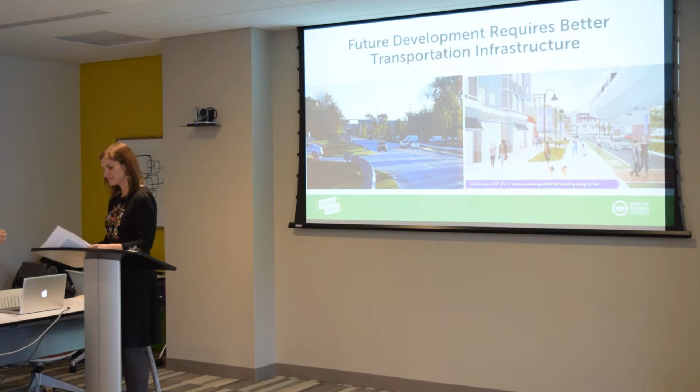As Rachel was mentioning, there's going to be a variety of new developments taking place in Moore Park KOP. We have the residential projects taking place on 750 Moore Road, with 248 units under construction right now. And then on Vandenberg Boulevard, you have 320 residential units opening up, we believe, this April. So there is a variety of new developments taking place.

King of Prussia Industrial Park is no longer strictly industrial. It's no longer strictly office. It's an actual mixed-use area. And then also, it's going to be inviting more entertainment venues, such as Bury the Hatchet, which has already opened up on 8th Street, I believe.

And we encourage people to come out and play at that location. And then also you have service and retail that will be opening up within the business buildings themselves for that mixed-use quality.

So with that new development, we needed to adjust the transportation infrastructure. The road diet itself has been something that's been getting studied for a few years now. The project team involves the King of Prussia District and Upper Merion Township.

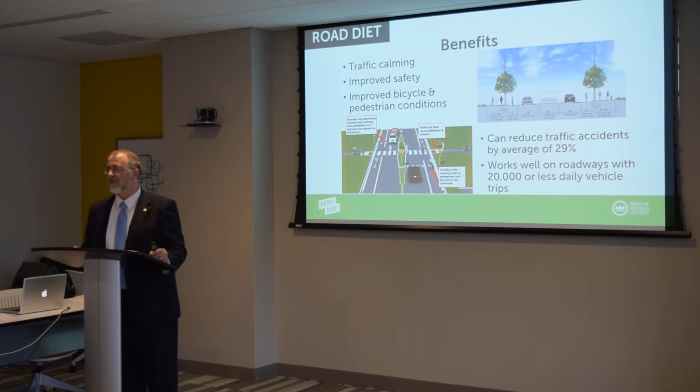The U.S. Department of Transportation has found that road diets can reduce traffic accidents by an average of 29%, and it works well with roadways that have 20,000 daily vehicle trips or less. Currently, when we did the study, the vehicle trips were around 12,000 per day. We projected out to 2025, and that's projected to be 15,000, so we're still well underneath the 20,000 vehicle daily trips.

So just as a brief recap of the history: in 2011 the King of Prussia District applied for the Delaware Valley Regional Planning Commission Transportation and Community Development Initiative Grant to study the road diet. In 2013 the road diet study was concluded, including Moore Road at the time. In 2014 Upper Merion Township and the King of Prussia District worked together to pass the mixed-use rezoning for the business park. In 2015 they were awarded a Transportation Alternatives Program grant from the Highway Administration for $432,000 to implement this program.

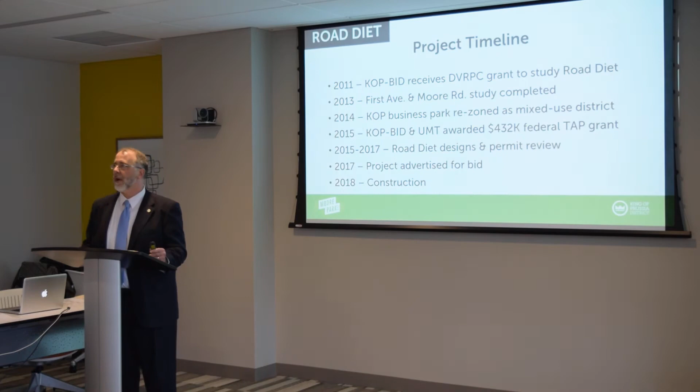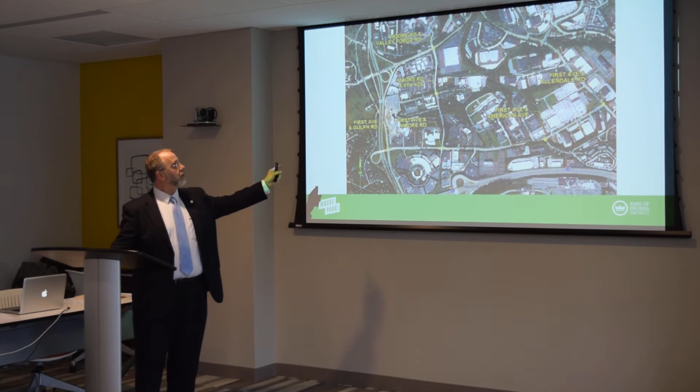2015 through 2017 went through the design and permitting review process, and at the end of 2017 the project was put out to bid. In 2018 the competitive bid was chosen, Highway Materials Inc. As I was saying, the project study originally looked at First Avenue and Moore Road, but this project is only taking place on First Avenue.

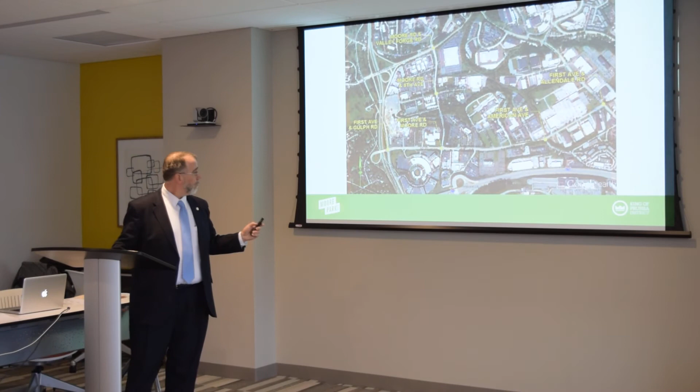As for existing conditions, there's a variety of conditions along First Avenue. You have not only the 4-lane road, but also varying degrees of right-of-way, so sometimes there's a shoulder, sometimes there isn't. You also have long sections along First Avenue without sidewalks, and those sections that do have sidewalks are not ADA compliant. You also have limited pedestrian crossings, strictly limited to parts of the intersection, not all four corners of each intersection.

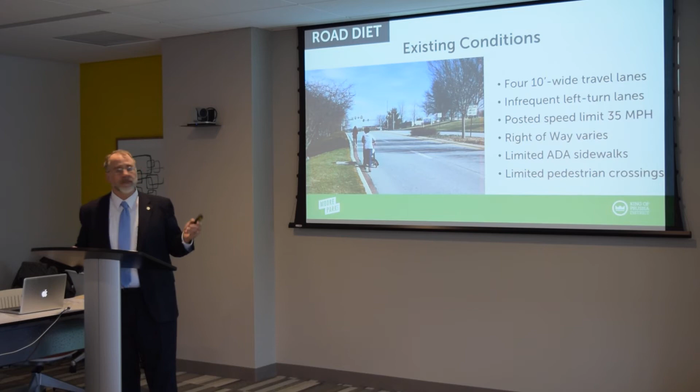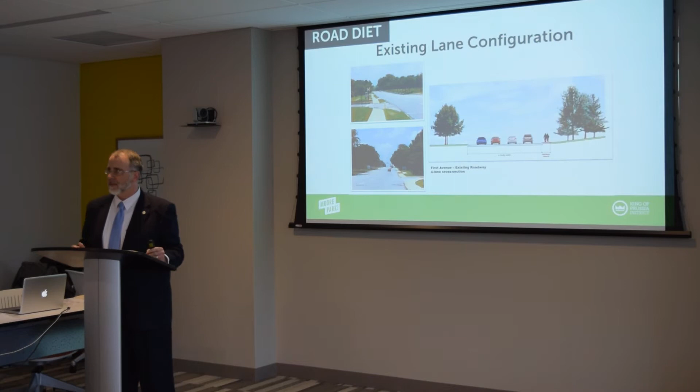The road diet is hoping to change that. Currently, with the 4-lane configuration shown in the illustration, it allows for greater speeds or encourages people to drive faster than the posted 35-mile-an-hour speed limit. Also, you have people turning left from the left lane, which some people perceive as the passing lane whenever you have multiple travel lanes.

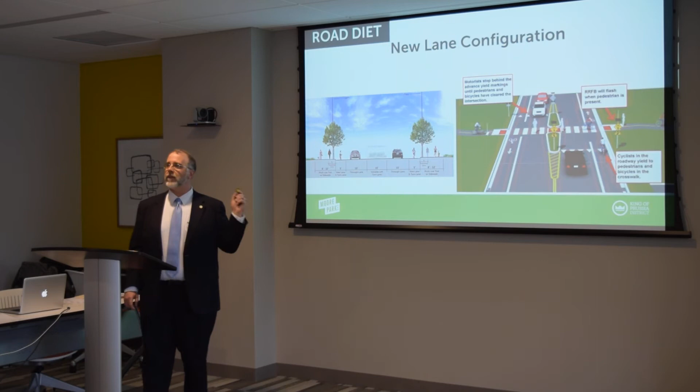With the new lane configuration, you will have one travel lane in either direction, plus a dedicated center left turn lane. That's where, particularly in the morning, you'll find most of the traffic backup, based on people turning left out of the inside lane. This will allow folks to pull into the dedicated turn lane to make that left turn into each of the individual parcels. There's also going to be a 5-foot bike lane on either side, and the median or shoulder will increase or decrease depending on the location.

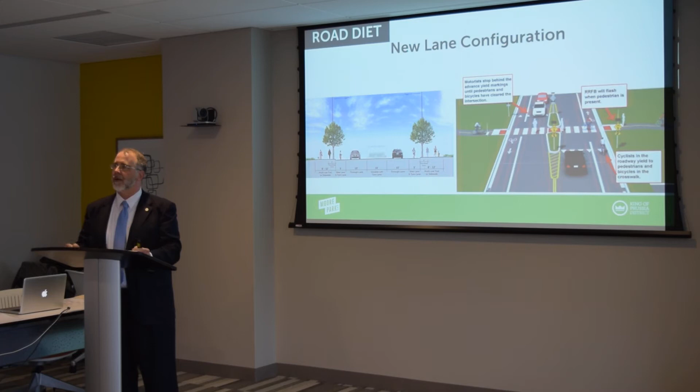The actual design does not change the distance between the current set of curbs - the current curbs will remain the same, it's just that the pavement markings will change. Also, we'll be having a mid-block crossing. This signalized crossing will be down between Radial and Trillion, crossing the road between Michelmack and Arkema. So that's where the mid-block crossing will take place.

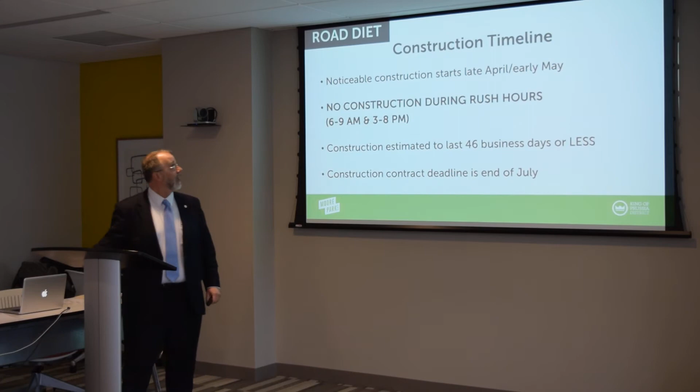For a construction timeline, noticeable construction won't start until late April, early May. There's still some PennDOT reviews that need to take place. The construction hours will not be taking place during rush hour traffic.

So between 6 to 9 a.m. and 3 to 8 p.m., there will not be any construction activity taking place during the weekday. Construction is estimated to last 46 business days. That could be less, depending on the actual time and also the weather conditions.

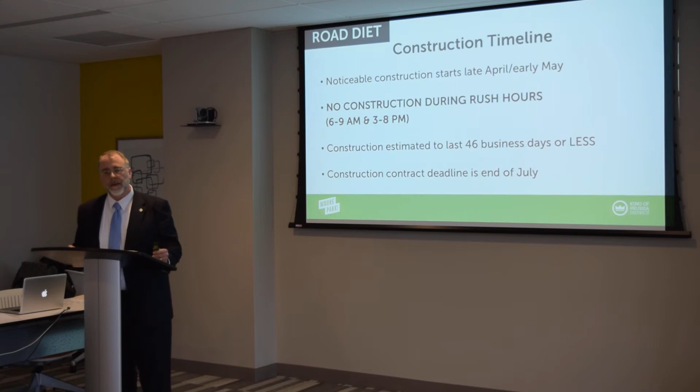And then everything is going to be wrapped up by the end of July. Tim will be the person right here sitting up front.

Tim, raise your hand if you could, please. He's going to be the primary full-time construction inspector on site whenever construction activities are taking place. So if you have an immediate question or concern on site, talk to Tim. He will be able to help figure out what's taking place and address the situation. Ray, we will be in contact with Ray, the construction inspection manager.

Milling and paving the roadway will not take place during the business workday. It will be at 8 p.m. to 5 a.m., and it's approximately going to be 6 days total. So milling and paving will approximately take 6 days, and that's only going to be taking place at night, so you won't have to deal with the noise and dust created by that activity.

The contractor and construction inspector will keep traffic flowing safely. If you've signed up with Julie in the back, we will continue to send out regular updates on the progress of the project, and provide any additional information if there's anything that takes place that you need to be aware of.

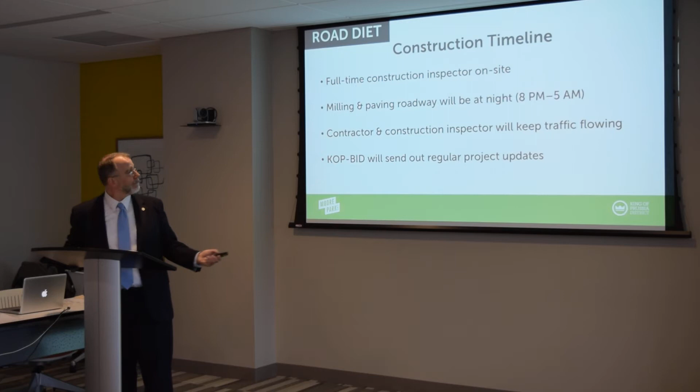So with that, you will have this sheet that's already been handed out to you, which has our contact information. This is just a brief one-sheeter. You can certainly contact me. That's my email address and phone number. If you have any questions or concerns, please feel free to get in touch with me.

We'll also be having all the information and updates placed on mooreparkkop.com. So I encourage you to visit the website. And with that, we'll open it up for questions. Anybody have any questions?

Back there in the back row. Are you planning on putting traffic lights up at businesses to alleviate what's sure to be significant congestion from workers trying to turn left onto First Avenue? No, there's not going to be any traffic lights.

Well, let me repeat the question. He was mentioning that people exiting the parking areas, asking if there's going to be traffic lights at those parking areas. There will not, but we anticipate that the traffic will not be impacted any more than it already is. You're going to be crossing fewer lanes in order to get into the travel lane. That'll be primarily between Moore Road and American Ave. And you will also be able to pull into the turn lane in order to merge into the travel lane if necessary.

Do you have anything to add? Well, Chris, you addressed it, but back when the study was evaluated, we did look at driveways up and down First Avenue, what those volumes were, and could they still be accommodated with the one lane. Obviously, it was a big concern at the study stage, and we're showing that traffic should still be able to access. There's still going to be gaps created by the signals at Moore Road and First and American Avenue, so that amount of volume should still be able to be handled in that one lane section.

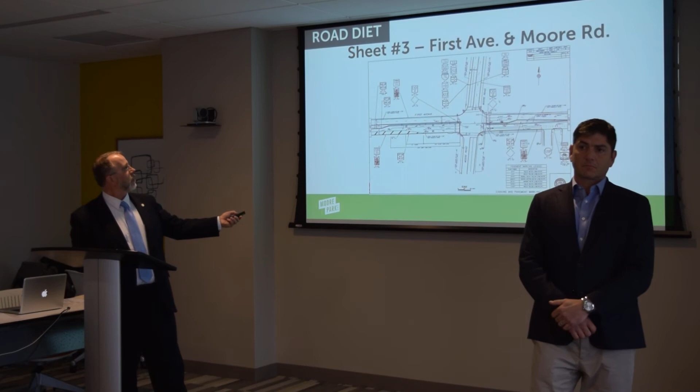So when you do get to the light, is it going to still be 2 lanes or 4 lanes? Beyond the light, it will be 4 lanes. Just before the light, it will also be 4 lanes. So like for 100 yards? The actual location is just past the top parking lot area, where the roadway opens back up to 4 lanes.

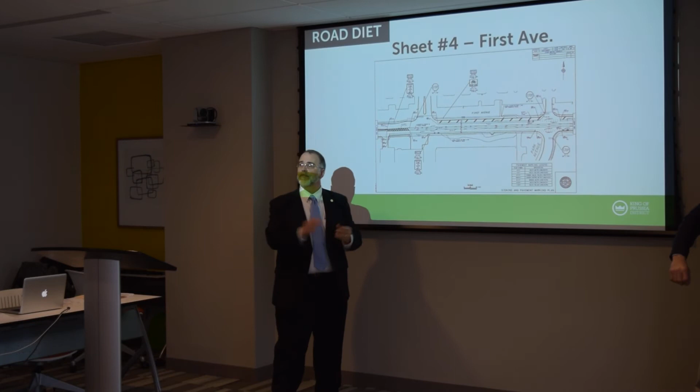So at the signal itself, you're going to have the same lane configuration you have today. The impact is that since we don't have 2 lanes the entire stretch, there'll be only 1 lane. You will have a little bit of a longer queue approaching that intersection, but we should still be able to process the same number of cars as we do today.

Towards Gulph Road, it'll be the same configuration as today, 4 lanes right now. So the only road diet section we're talking about is just east of Moore Road, or north of Moore Road if you want to call it First Avenue, north-south, to just south of Allendale. We'll go through the American intersection, but at either end, the lane configurations are still going to be as they are today.

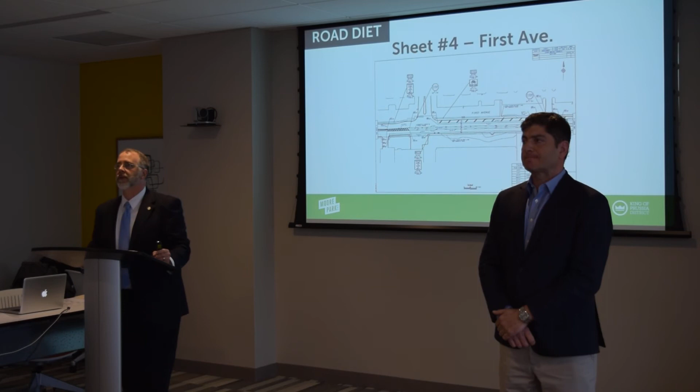Will truck traffic be affected in any way, and access for trucks to the industrial buildings? No, and thanks for pointing that out. One of the things I didn't mention was that with the road diet, most of it is pavement markings. There won't be physical barriers.

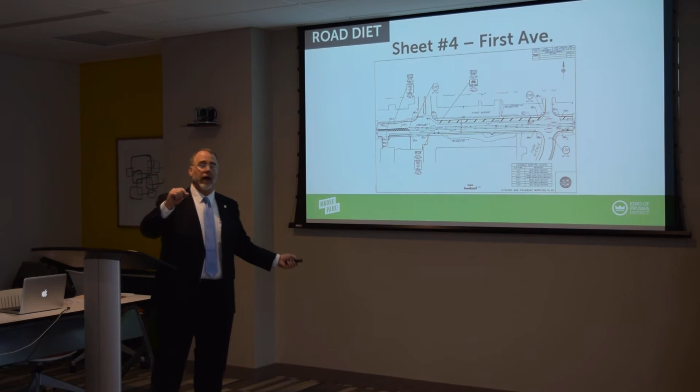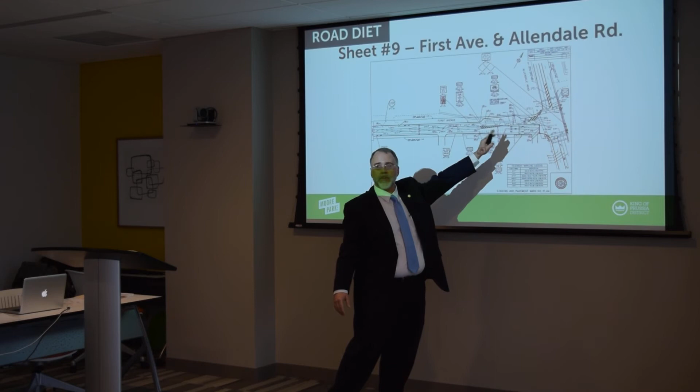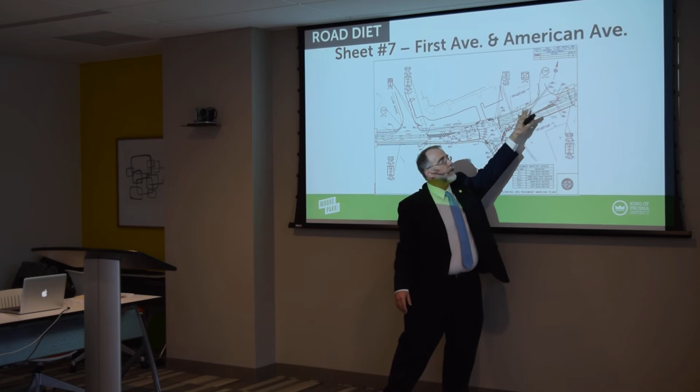So particularly down on the First Avenue end, it's going to open back up to 4 lanes, as Brian was saying, right here - sorry, 2 lanes for turning at Allendale Road. But closer to American Ave, where you have trucks going in and out of First Quality and GTI, that is strictly going to be pavement marking. So there's going to be the turn lane that's still there, but trucks will be able to maneuver over it in order to get into the parking lots or get out of the parking.

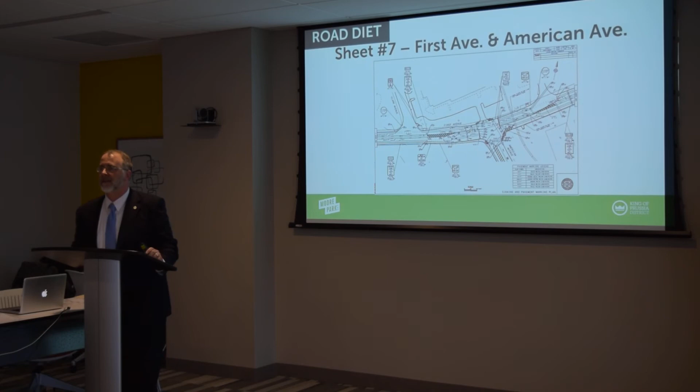Is there any thought about changing anything about where the casino is, how people exit out of there onto First Avenue? Especially with the bus depot or bus stop there, you cannot see to make a left or even a right if any traffic's coming down. I don't know if that bus stop is staying there.

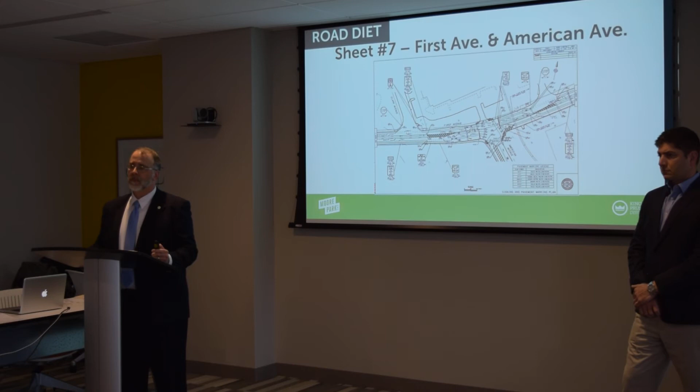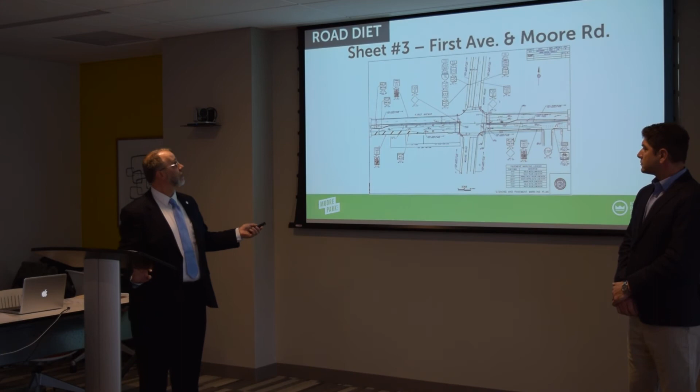It is, and I'm trying to think about the exact location. It's got advertising on it, which is mainly what blocks the view. As part of the linear park project, you're talking about the bus stop, the bus shelter that's on the casino side? Yes. So as part of the linear park project, which will be taking place next year, that information will also be placed on the Moore Park KOP website.

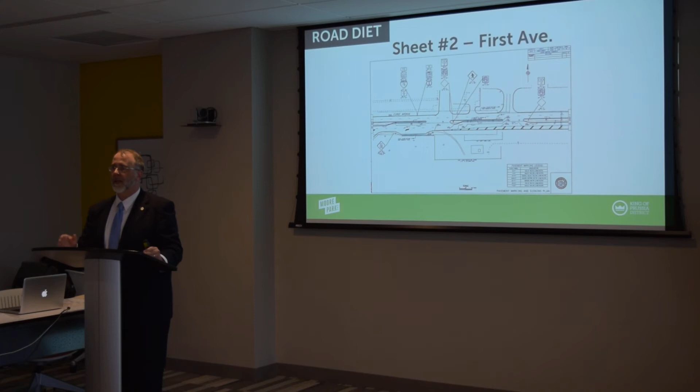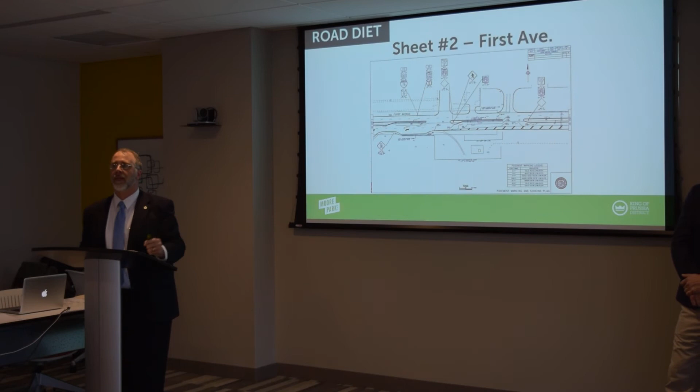That will also include new bus shelters that will have clear panels so it'll be easier to see when people are there. But I don't know about the sign that the casino has - nothing's going to change about that, but coming out of that casino is a nightmare when it's rush hour. Right, right. This project won't be impacting that, unfortunately, but it's something we can certainly take a look at in the future.

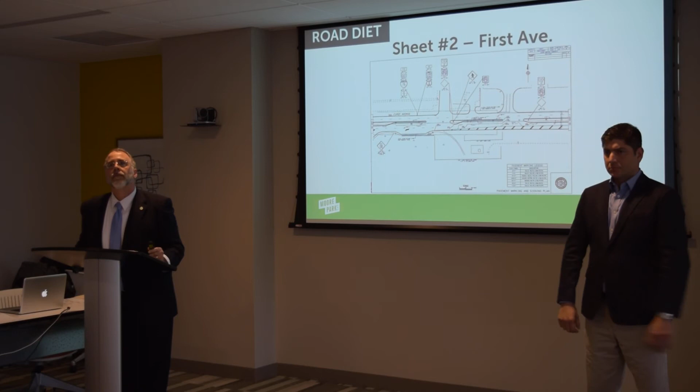On your drawing, where the crossing is, it looks like there's a pinch point there where the road narrows. Is that correct? Well, what happens at that location is it will reflect the 3-lane section, but instead of just the pavement marking in the middle, there'll actually be an island, a concrete island that'll give pedestrians the ability to stop halfway if they need to.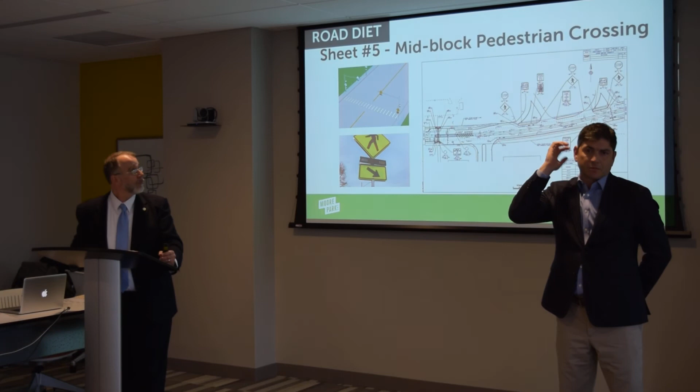What I'm getting at though, does the road narrow from the 10-foot width to 8.5? No, it's the same lane width and we'll have the same exact cross-section, meaning 2 lanes, the center lane, and then the 5-foot bike lanes. So it's the same 40-foot cross-section there. Okay, but you're not narrowing? No, that drawing appears that the curb does come in there because there's excess shoulder there today, but just north and south of that new lane, your new lane markings, it's going to stay 10 foot through there.

Which brings me to my second question: people tend to drive the speed that the road is engineered for, correct? Is that actually going to be a more hazardous condition with these pinch point traffic points, having one lane going at the same speed perhaps that they are today?

No, I think the one lane should get you closer to the 35-mile-an-hour posted speed. In off-peak conditions, you're still going to see speeds well in excess of 35 miles per hour. But during rush hour or peak hours, I think you'll see more conformance, or closer conformance, to the posted speed limit.

Last question: what do you plan to do after the project's done to evaluate the effect on speed, cars, etc.? Well, I don't think there's a formal program in place, but there is the ability to. My question is, if you evaluate it and it creates a queuing mess and level of traffic service issue, and it's not slowing anybody down, is there a chance it would be reevaluated, or do you just live with the traffic mess?

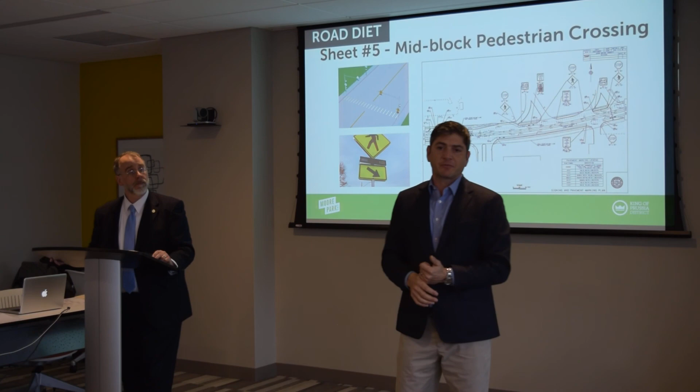The road diet, as you can see, took 7 years to get to this point because it was studied for many years, designed for many years, and then we worked with all of the stakeholders for many years — not just commercial office owners. We worked with industrial property owners, some of whom are here today, and we worked with the township residents. So we have to just look at it.

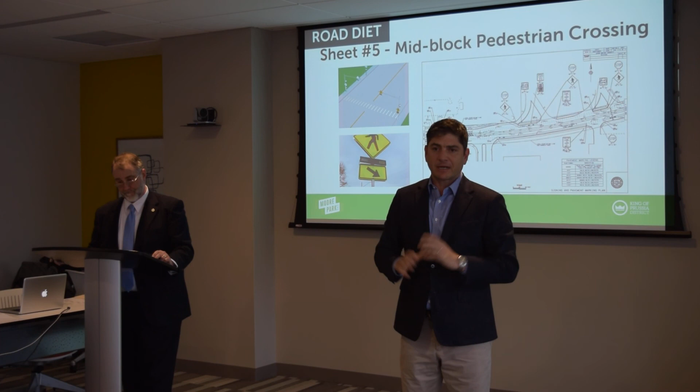But I'm not going to tell you it's not going to add to your traffic. It probably will add a little bit to your time at the end of the day. But we really only deal with that piece of time during the day. We'll have to remember that too. Thank you. Any other questions?

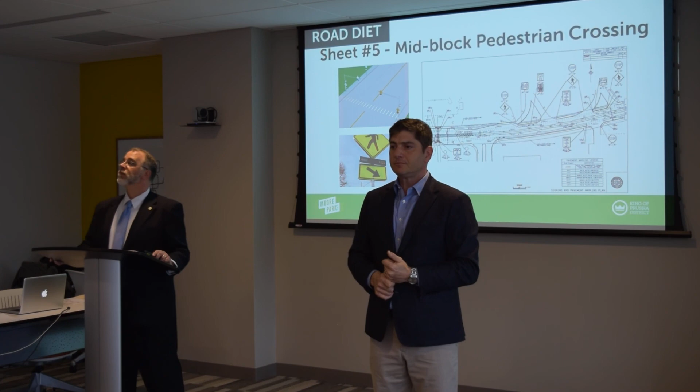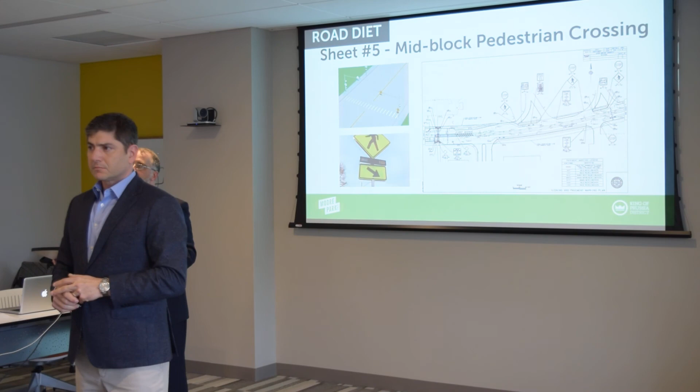Radial used to consist of a series of companies that were pedestrian connected in a way. There was 1075, there was 630 Allendale, in addition to what's now all consolidated as 935. So there is some benefit, even if you're commuting by car, when you're going for meetings — there is an interconnectedness that flows. The lack of pedestrian sidewalks in certain portions of the avenue is acutely felt when you're trying to navigate that as part of your day-to-day.

The crossing is another issue — when we have the concerts every summer, the Thursdays at noon, which are fantastic, there is protection at that intersection to allow people to cross. That's recognizing the fact that it's not an easy span to traverse in the current conditions as they exist. The controlled intersection from Arkema and Radial, I think, is the biggest improvement I look forward to personally.

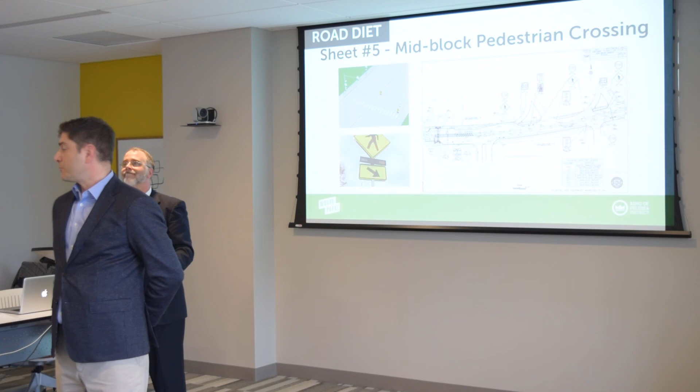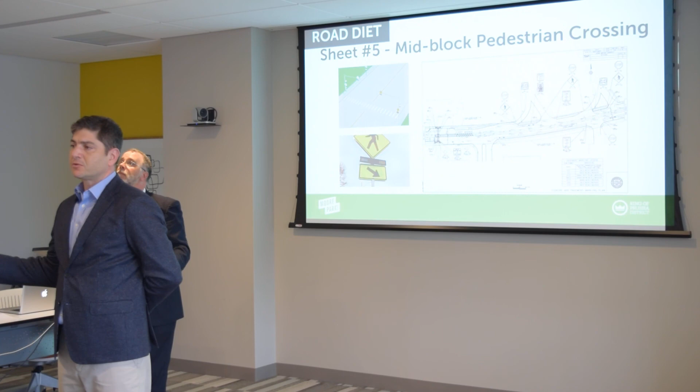We didn't even touch on the linear park, but that's another big project Chris is working on. That's going to connect all of the property owners on First Avenue from North Gulf Road to Allendale Road with a wide sidewalk, lighting, benches, and landscaping. Hopefully that will help that interconnected nature of getting these businesses together, reducing car trips because you don't have to drive to that building down the street — you can walk, bike, or use other modes.

So you said the linear park work is...